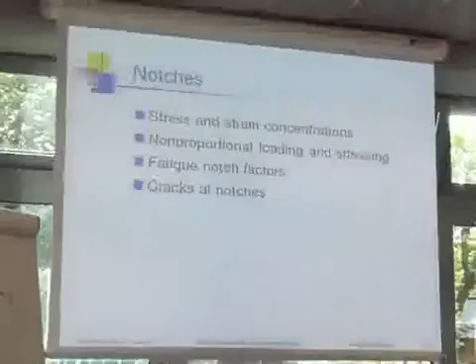So I wanted to take a little time this morning and talk about behavior of things with stress concentrators that are subjected to more complex loading. I'm going to talk about stress and strain concentrations and some ideas about non-proportional loading, and look at states of stress effect on fatigue notch factors, and finally I'll mention a little bit about cracks at notches.

So I always like to start in the morning with some little story, so I wanted to tell you one about my family. I was gone on a trip like this, and I got home, and at that time my daughter was maybe four or five years old. She's glad to see me, I think, but probably not. I said, 'Why don't you come to the office with me today, and I'll take you to McDonald's for lunch. I just want to go up and check the mail.' Well, okay, chance to go to McDonald's for lunch. So I went, and the graduate students figured out I was in my office, so they came to see me and I talked with them, and a few people called on the phone and I talked with them. The five-year-old is not as happy as she might be, but I was always prepared because I had colored chalk, and coloring books and all these things to entertain my children. So finally we go to McDonald's, and she's happy, and we go home, and when we get home, her mother asked her, 'What did you do today? You were gone a long time.' And the five-year-old said, 'Oh, it was really boring, really boring.' And then she says, 'Well, what was your father doing?' And she goes, 'Well, people came to see him and he just talked. And then he just talked on the phone. And that's all he did was talk. And I certainly don't understand why they pay him for that.' So this is what a professor does in the eyes of a five-year-old. And this is a story I've tried to improve on over the years, but I can't. It's a very good description of what I do. I just talk and I talk and I talk, and people pay me. Sometimes I have better things to say than others, but I don't know.

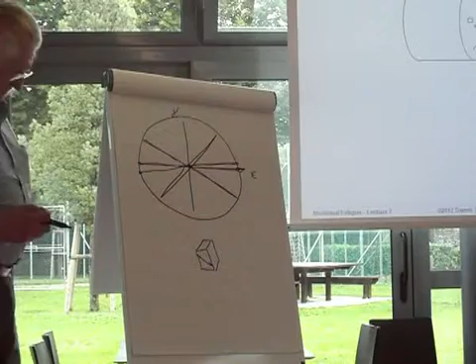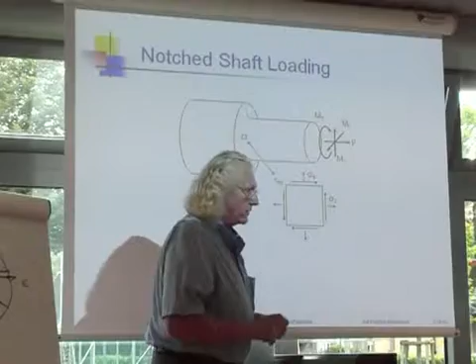Okay, so we can do this, and we know what our strategy is, because if you think about what we did yesterday - we said, fine, we have this big blob of material, and we know someplace there will be a critical element, so I've been drawing that just as a cube, and we have some external loads that act out here, and finally that resolves into stresses in particular directions in this cube when we calculate fatigue life. So the only difference now in going to a structure is I don't know where this cube might be located. If I just have a bar like this, it's pretty obvious where the cube is. So now we have another level of searching - I have to search through the structure and find the critical spot. And then once I find the critical spot, I have to find the critical directions in that spot and how the loads combine. Well, these are pretty easy to do, because I know the maximum stresses will exist here someplace around the radius.

It's worth pointing out the stress concentration factors for these kinds of geometries. If I look up the results for a bar that has a groove on it, and look at the stress concentration in bending, then for various ratios of the two diameters, as the radius gets very small, the stresses get very high.

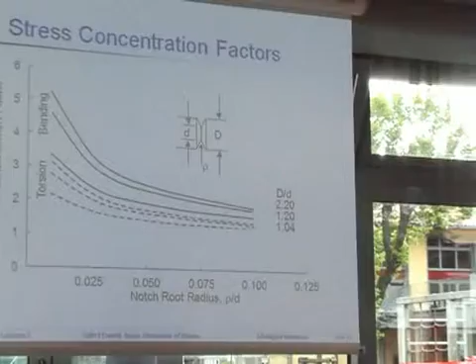I only show you this to demonstrate there's a big difference between the stress concentration factor in bending and torsion. If you could figure out how to make everything in torsion, structures would last a very long time. Remember yesterday I showed you that in torsion alone, material parts last a very long time because these shear cracks have trouble growing, and the stress concentration factors are lower as well.

So all the engineers know about stress concentration factors. So how about we look at what is the stress concentration factor for a simple hole in a plate?

Who thinks it's 3? You know, it's morning time, we need our morning exercise. That's usually a good answer, but the one I always give is: I don't know.

And the reason I don't know the stress concentration factor for a hole in a plate is that I don't know how the plate is loaded. So the stress concentration factor for a hole in a plate could be something between 2 and 4, with 3 being the most common. That's why yesterday I said if you don't know, that's the very best initial guess. It's always the best initial guess for these things.

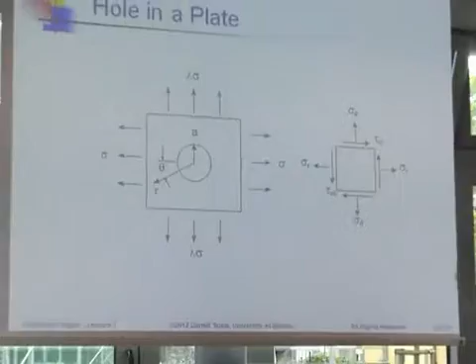So let's look at this a minute. There's a hole, and I showed this before when we looked at a crack. So I put a hole in there, and load it with the stress in this direction and some stress in the other direction, which is a constant lambda times this one. There's the hole, and I can look at the stress fields everywhere around that hole.

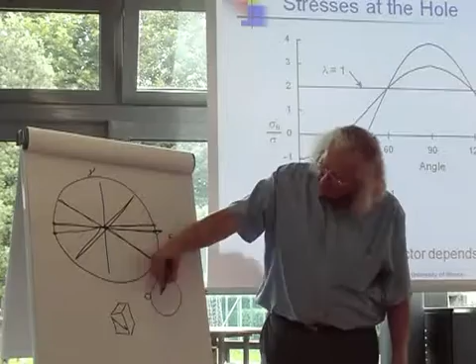If you just look around the edge of the hole, then if you have biaxial tension around the edge, the stresses are constant everywhere - always the same. And of course, you have the stress concentration: the magnitude of these stresses is only twice as high as the nominal stress. And of course, the familiar stress concentration of 3 if this were just loaded in tension, like that.

And if I twisted it, then the maximum stresses are at these 4 spots, and they're 4 times as big. So I really don't know the stress concentration factors until I know what the loads are.

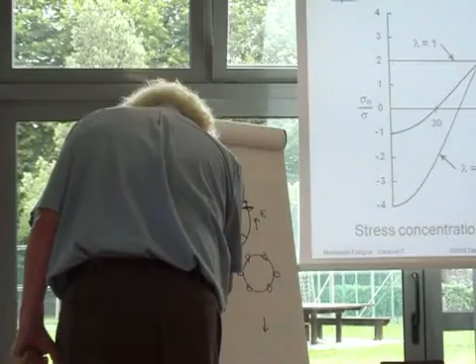The other thing is, what if I twisted the hole? What if I applied pure torsion to a hole? Instead of looking at what the tensile stress is here, I look at the shear stresses around the edge of the hole. And if you do that...

There's the shear stresses around the edge of a hole, which is loaded in torsion. And if you look right at the edge, you'll see that the shear stresses are 0. And they peak up at a distance of about 1.3 times whatever the radius is. Now why is that important? Well, I'll show you this slide first.

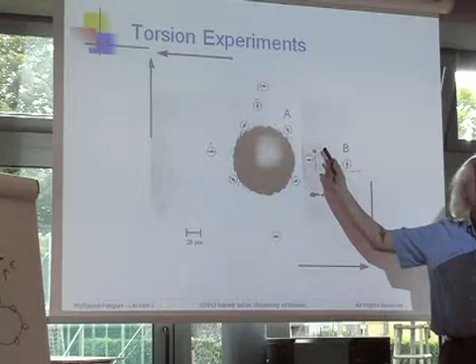If you have a hole in torsion, frequently you get all the cracks to initiate out here. And people say, isn't that strange that the cracks initiate away from the hole? This is a particularly important problem in rivets and aircraft. Frequently the cracks initiate not at the edge - there's a crack here, one over there, one out here. And if you fatigue test this for a very long time, after a very long time, you start to nucleate some cracks over here, and those cracks come.

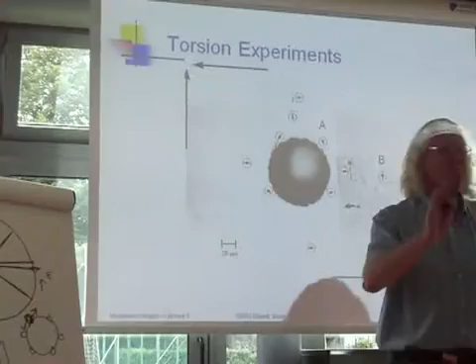I'll bet I can manage to trip over this wire and fall down before the hour is over. This is my prediction. Remember, if I don't get up from this, then the class is dismissed. You are not to help me.

Yeah, so these are the principal stress ones, right? The maximum principal stress exists there.

Okay, looking at all of the equations, let's go back to the picture of the hole. If you look around the edge of the hole, there's a little material element. Let's put this right on the edge.

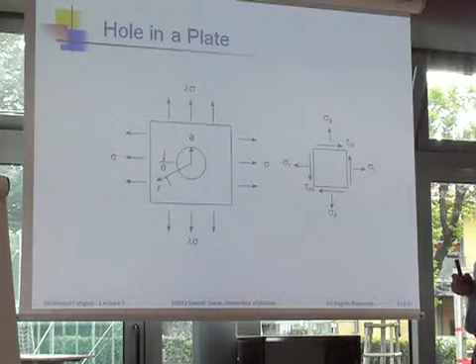Right here I could have three different stresses. I could have what amounts to a hoop stress, which I call sigma theta, the stress in this direction anywhere around the edge of the hole. Then I can have a radial stress, which goes this way, and I can also have a shear stress at the edge of the hole.

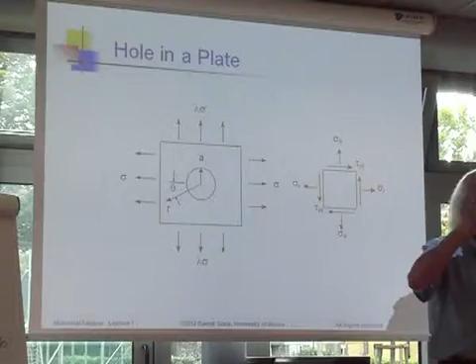What you find is that the radial stress must be 0 at the edge of the hole because it's a free surface, and the shear stress must also be 0 there for the same reason. So no matter how complicated the loading is for a plate with a hole in it, stresses around the edge of the hole where the cracks initiate are always uniaxial. It's always a uniaxial fatigue problem.

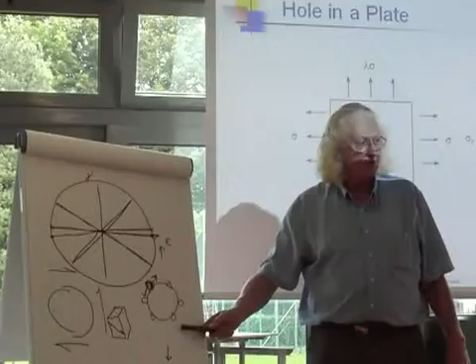That's why I say that for plate-like structures, plates with holes in them, or things that look like plates with holes, it's really not a multi-axial fatigue problem. The failure location may change, because depending on whether it's loaded in shear, tension, or biaxial tension, the magnitude of the stresses around the edge of the hole changes, and the location of the maximum stress changes too, but the state of stress is simply uniaxial tension.

So that means that the real multi-axial fatigue problems come from solid structures — things like shafts and turbine blades, things that have a lump of mass of some sort. Because there you truly can build up multi-axial stress situations.

So if we look at the loading of notches, I want to look at three cases. First, uniaxial loading that produces multi-axial stresses at notches. Second, multi-axial loading that produces uniaxial stresses, which is the one I just talked about. And third, multi-axial loading that gives multi-axial stresses as well around notches.

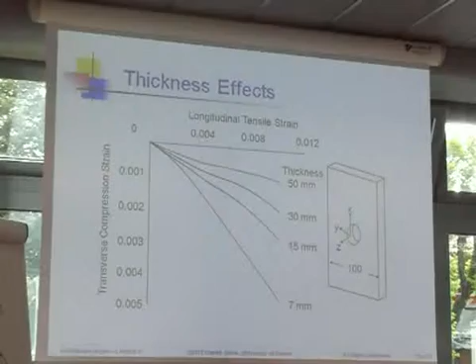This is the one I showed you yesterday, so I won't spend extra time on it, other than to say I have a plate with a hole in it as before, and I said you can pretty much ignore multi-axial fatigue when you have structures with plates with holes in them. That's true until the plate with a hole starts to look like a solid.

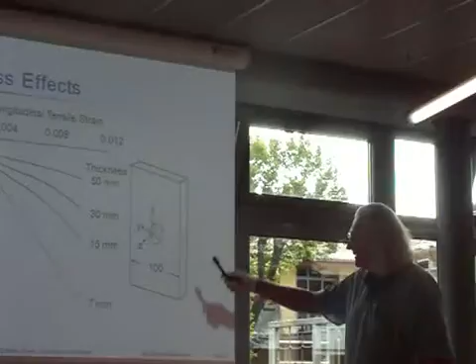If I have a really thick plate — suppose this plate is 100 millimeters and I made it 50 millimeters thick — that's a solid just like a shaft, unlike a plate with a hole in it that's 5 millimeters thick of these dimensions.

So let's look at the other case a little bit: multi-axial loading that produces uniaxial stresses. Let's just take a bar and bend it in a couple of axes.

Let's take a practical situation — maybe this is the axle on a car or a tractor or something like that. Maybe the axle on my all-terrain vehicle. So you can imagine what happens.

As I'm driving about with this vehicle, it's going to come up and down like that from the weight. But I'm not a very careful driver, and I'm not deterred by small trees and things like that, so I'm quite happy to run over them.

When I do that, I get a big force in this direction as well. So looking at what's happening to the axles on my ATV, it does this for a while sometimes, and sometimes this, and sometimes all kinds of combinations.

Let's look at this in a very simple idealized example: I'll put a moment in the X direction and a moment in the Y direction, and say this is the repeating load pattern that I have. And how do these things combine?

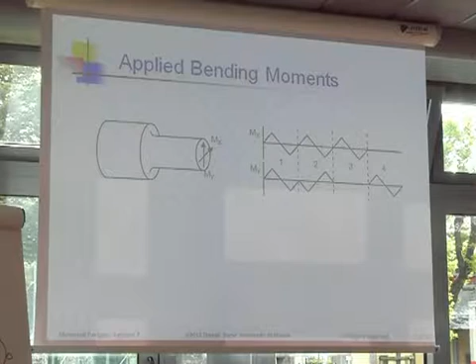Yesterday I gave you all these quizzes about how loads combine to produce different states of stress in my material element. Today I want to do the same thing, except rather than looking at how different loads combine to produce stresses in the material element, we'll look at a real three-dimensional object where the stresses combine to produce failures in different places. Sometimes two loads damage the same place, sometimes they don't.

So if we just look at this, you can see what happens. In the first one, I have a moment in both of them. In the second one, I have these two moments which are just out of phase with each other, and then I have a moment only in one, and then a moment only in the other. If we put that loading history and all the geometry into any of the FEA solvers, this is what would happen.

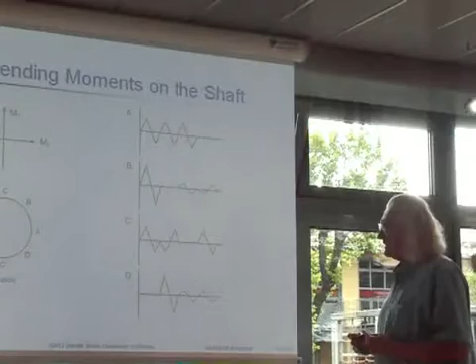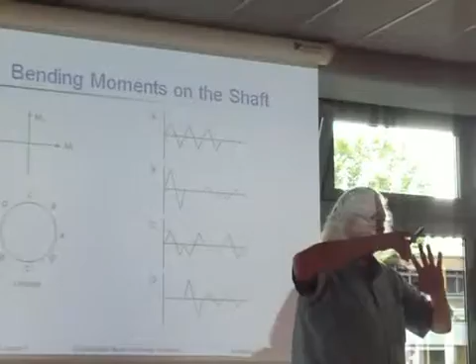So if we look at the first failure location, think about the shaft, and I just mark different locations around the edge of the shaft. All the loads in the history I chose were completely reversed in tension and compression. So as I look around the circumference of the shaft, whatever happens at A will also happen at A prime, just at the opposite sign because it's bending. So for this simple example, I know I only have to check 4 locations.

Before I check, I have no idea where this may fail around the circumference of the shaft. So if I look at the loading history at A, it will just combine with this magnitude. But remember, I have bending in this direction and bending in that direction as well. It's a trivial example—you know the answer that those two bending moments will combine at 45 degrees to produce something of even larger magnitude.

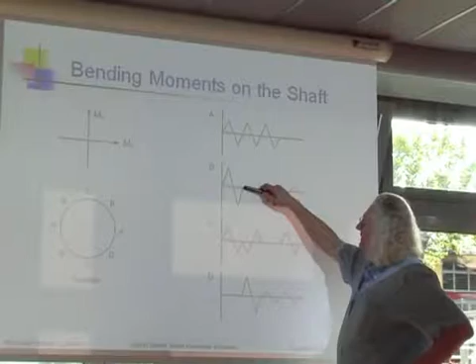So if I look at that loading history, you can see there's a really big cycle at the beginning and then pretty small cycles after that at point B. This is what happens at point C at the top, and this is what happens at point D at the bottom, and at that spot at 45 degrees.

So if I have a simple shaft like this that just bends in 2 axes, that's pretty easy to analyze. But how about that motor carrier that I showed yesterday? That particular one has 16 load inputs. So how do those 16 loads combine to produce damage in some spot in the structure? Of course, the answer is I never know.

But the concept is just what I've said here. We just combine all those loads and do a brute force search to find out what places in the structure see the highest loads. That's all there is to it.

In this loading scenario, if I look at the loads, I can say that was complex and out of phase and all those kinds of things. That may be true of the loads, but from a materials perspective, this is simple, constant, uniaxial loading, isn't it? Because the external loads combine at different places in the structure, and at each of those places, it's a uniaxial stress state.

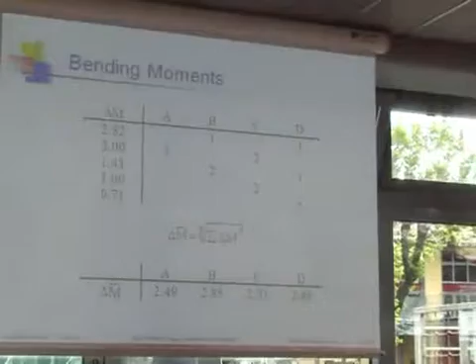A lot of times I am interested in finding the failure locations, and I'd like to find them very quickly. When I do that, I have very easy things.

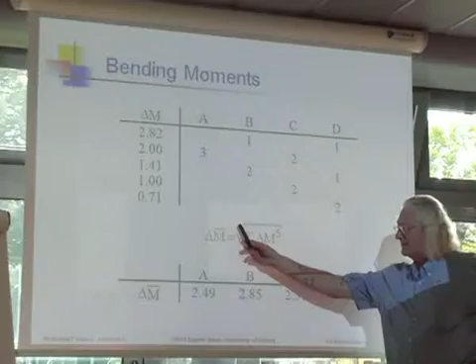If you want to get some idea about where the failure location is, there are some tricks, and this is one I told you last time. There's a universal slope to all SN curves, so if I want to know the relative damage of something, the easiest and fastest way is to take the ranges of stresses or moments, raise them to the 5th power, and take the 5th root. That gives you one stress number you can compare at different spots in the structure, so you can quickly find the most critical spot and focus all your time and attention there.

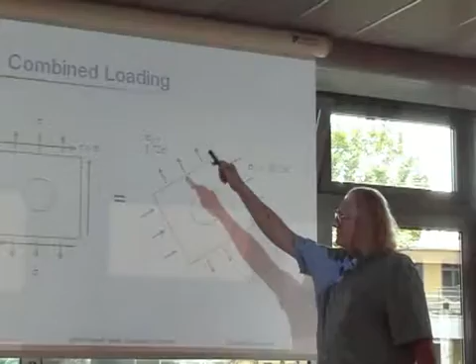So let's now look at combined loading. You can get multi-axial problems only as you start to add shear stress. If you think about taking a plate with a hole in it and subjecting it to both tension and shear stress, what's going to happen is you produce a maximum stress in some other direction, not the loading direction. For shear and tension loads equal to one another, the principal stress is almost twice as high as before.

I show you this slide because I'm going to show it again, since it's the quiz question - about one of 10 slides in the quiz - about what happens when you load things in tension and shear.

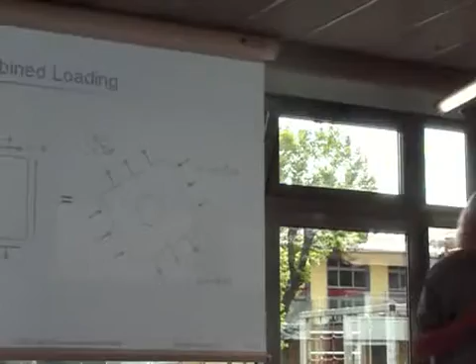Anybody think of an example where something is loaded in bending and shear, a plate with a hole in it? Wing of an airplane - it bends. A big engine sits out here, sometimes does this, and twists a lot, and bends a lot if it goes through turbulence and twisting. So it's an important load case.

All this kind of stuff is simple mechanics. Depending on what the loads are - combinations of both bending and twisting - you can imagine I'm flying through the sky doing whatever, doing this for a while and that for a while. If I took the loading history and just took every load like this, and the twisting loads, and added them all up, I would have a very pessimistic estimate of what the life of the airplane would be.

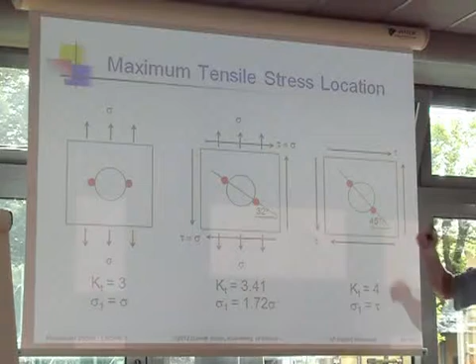The reason is that every time it flies, when it's doing this, it's damaging this location around the edge of a rivet hole. Then when it's twisting, the loads may be much higher, but it's damaging a different spot. And there aren't as many twisting loads. Maybe it's only twisting and not bending at all, and that damages yet a third spot. So what happens in a real structure frequently is damage is distributed around the stress concentrator. Unlike what we do in the lab with little test coupons where all the damage is focused on one spot only, a real structure is distributed everywhere. That's why things can last a long time.

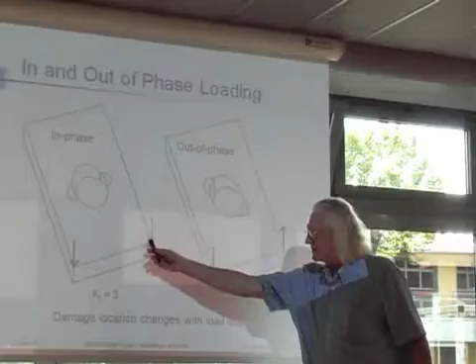We talked yesterday about in-phase and out-of-phase loading. Here's another example of the same idea, that the damage location just changes with phasing. So I take this plate, load it, and put two loads in phase, and that damages it where I've shown. If I just change the phasing of the loads, that changes the magnitude of the stresses, but it also changes the damage location. I'll leave that topic with all those examples, and go on to things that really cause multi-axial stress problems.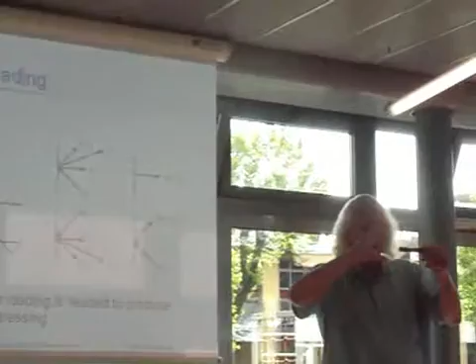A way to get multi-axial stress problems and out-of-phase loading is to take these solid structures and introduce shear. You can take a shaft and think about having a bending moment in one direction and a torsion applied to the shaft. I run a small loading history and think about the stresses in the X direction, the bending stresses, and the torsion stresses. For this geometry with just bending and torsion, there's one spot that sees the maximum load because the shear stress is distributed uniformly around the edge. If I wanted to make the problem more complicated, I'd add another bending moment, and then I could distribute the damage everywhere around the circumference.

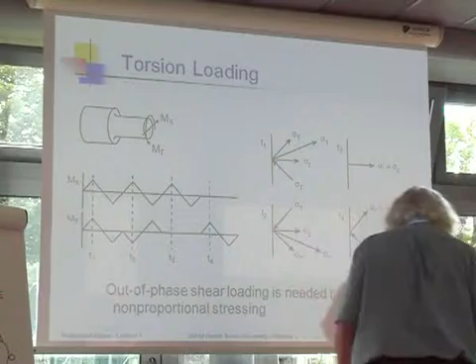I'd like to show you how the macroscopic stresses combine. Let's look at what happens at time t1. I have two principal stresses that come from the torsion, here and here, and I have bending at the same time acting in that direction. Those are the individual components, so you have to more or less add these vectorially - that's not literally true because you have to account for differences in area, but let's visualize it that way. When we vectorially add those stresses, we get a big stress out in this direction, at an angle of about 30 degrees.

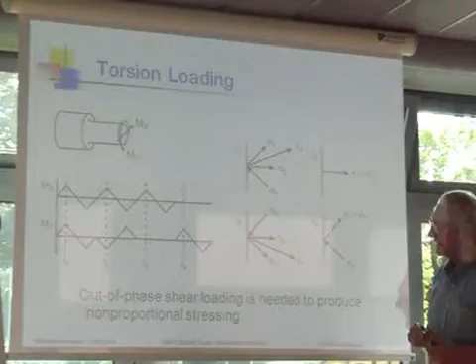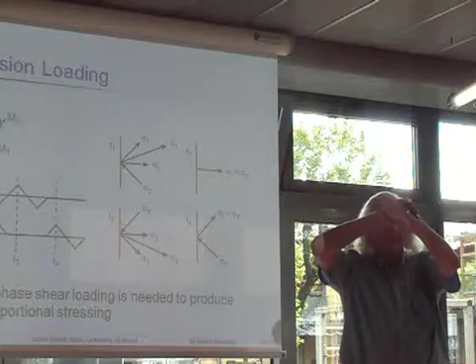Now as we proceed to time t2, we have a different situation because I've simply changed the direction of the torsion. When I change the direction and vectorially add these again, you can see I have a big stress component out here. So what's happened is the principal stress direction starts here and moves over to here, which means all the shear stress directions change as well. This means I have one of these out-of-phase loading situations where I'm activating all shear planes between this one and this one.

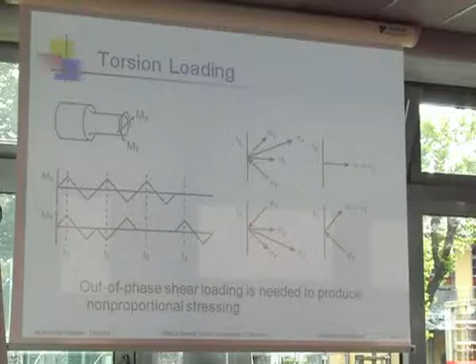Then finally at time t3, the principal stress direction is just in this direction, so now I'm damaging one plane, but the magnitude is much smaller than the others. Finally at time t4, I have the two principal stress directions like that, and I know where the maximum shear plane is. So if I want to analyze this, it's really a non-proportional loading problem. After finding the point in the structure, I now have to find which planes and directions have the most fatigue damage.

Okay, so now I know what the macroscopic stresses are, and I have to search and find all these locations. Let's say we can do that. I have another problem now when dealing with real components that we haven't talked about yet, and that's the effect of the gradients.

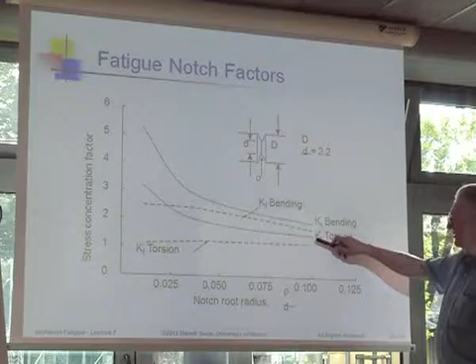So we have this concept of the stress concentration factor - these are the bending and torsion cases I had before - and as I go down with the notch root radius, this goes up, and if the notch root radius is zero, then the stresses will be infinite. I have no problem with an infinite stress in the structure.

Why not? The infinite stress acts over a length of zero, doesn't it? So how can an infinite stress acting over a length of zero be damaging, if it's acting over a length of zero? It's a problem, isn't it?

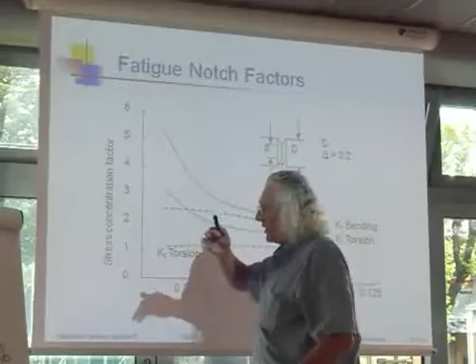If we think about it, a real material has some kind of crystal structure, and we have to have a concept that a stress has to act over some volume of material. Material scientists always talk about this as the process zone of the material - it's that stress which is important, not the infinite stress which acts over zero length. We can take that same concept, for both torsion and bending.

Let me talk about some real data. So I take these two structures where the middle diameter is the same. I run a bunch of tests on this one, and here is all of the fatigue data.

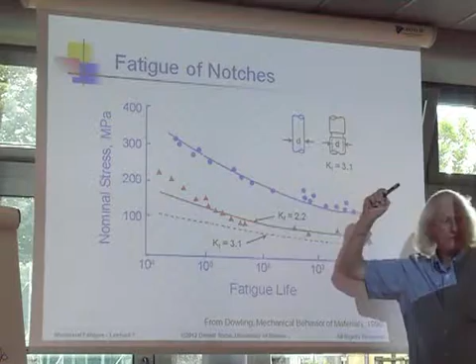And I do all the theory of elasticity correctly, and I calculate what the stresses are here, and the stresses here turn out to be 3 times the average stress. So that means if I wanted to apply fatigue theories, what should happen is I should take all of this materials data here, and then divide this by 3. And that should be a very good estimate of what this does, because that would put the same stresses there. And if I do that, this is the line you get by dividing it by 3.

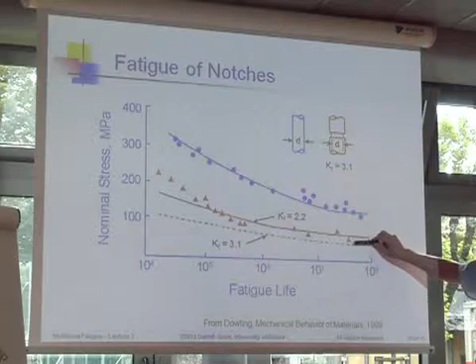And then you go into the lab, and after going into the lab, you say, what do the real experiments do? And you can say, wow, this is pretty good. Look, I was expecting at this stress level to have a life of about 100,000 cycles, and in fact, I could go 10 or 100 million. Pretty significant error, isn't it?

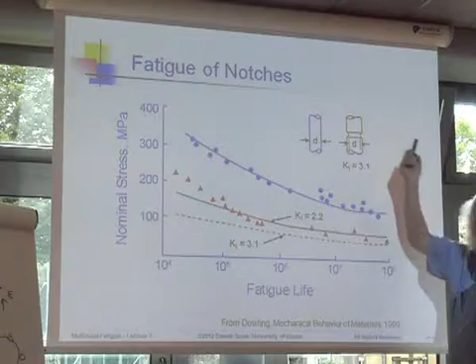You say, wow, this maximum stress is not what's really important, right? The effective stress concentration is only about 2. The 30% difference, right, and 30% lower. Almost everything people do in fatigue reduces the design stress, so things are bigger, heavier, and so on. But here's something that says, wow, maybe you can use higher stresses than you think.

So let's look at this effect, and this is the so-called gradient effect in fatigue. And I like to explain

People have looked at this, people have looked at all of these gradient things for a long time, probably for more than 100 years. And there are a couple of famous pieces of work.

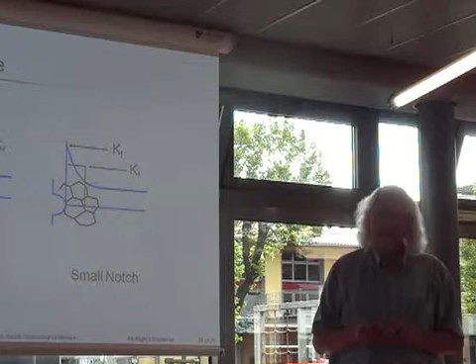One of them is by the German Neuber. And Neuber actually was a mathematician. Many of the stress concentration factors that we use today come from his work. And I always assign his papers to my students to read because they are incomprehensible. Yeah, they're filled full of elliptical coordinates and so on, and then at the end pops out the answer. And of course we are only interested in the answer.

But he also was interested in these gradients, and he explained things as follows. He had a concept of a mosaic block size, is what he called it. And he said it's some kind of material process zone. But he was a mathematician, not a material scientist, so he didn't associate it with any specific material dimension. I always like to do that, even though it's not correct, because the material dimension is not the grain size. But I like to use these individual crystal sizes just for illustration, because it helps us understand it a little better.

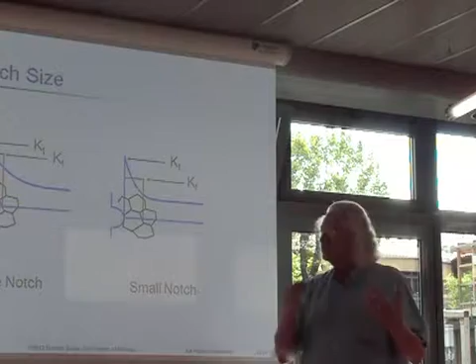So imagine now that I have this circumferential notch, and here's just the outside geometry that we looked at. And I think about what the stresses are. So I have all of my stress analysis, and here is the stress field. As we go away from the notch, the stresses become lower. And when I had the previous slide, that stress we calculated, 3 times the average stress, that's the thing way up here. I'll just say that that's the stress coming from KT.

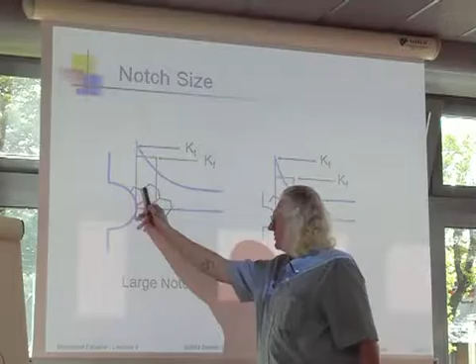And now I superimpose that stress onto the microstructure. I've drawn a little microstructure here of these individual little grains, right? And think about this now as the process zone. If that's the process zone, what stress acts in the process zone?

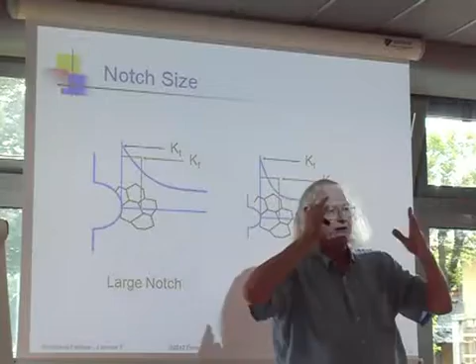Well, it's not really the maximum stress. If I think about this from a material science viewpoint, an individual crystal in a material cannot support a stress gradient, because I reach the critical shear stress, and as soon as I reach it, that crystal shears. A dislocation runs from somewhere in the middle out to the entire edge. So you can have this concept that materials will have constant stresses over this process zone. And like I say, I like to use the grain size as the process zone because it's something I see in a microscope, even though it's not quite the right dimension.

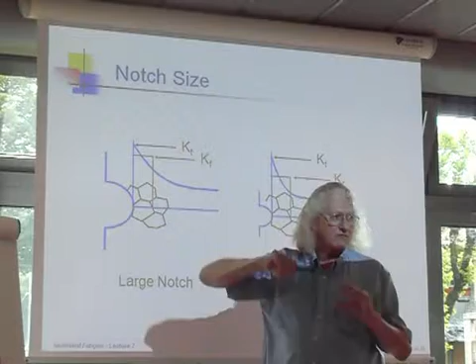So this idea of the fatigue notch factor, Kf, from the previous slide says, okay, I want this average stress here, and this average stress here might only be 2 times the nominal stress, and that's the effective stress concentration in fatigue. That's the idea behind this.

What would happen if I made things smaller? If I just make this geometrically smaller and look at the stress field, making it smaller essentially moves the stress field in this direction. Now I apply the same arguments: I want to test something with the same stress concentration. In a real structure, we don't think in terms of stress concentration factors, but think of this as the calculated surface stress in a finite element model of something a little smaller.

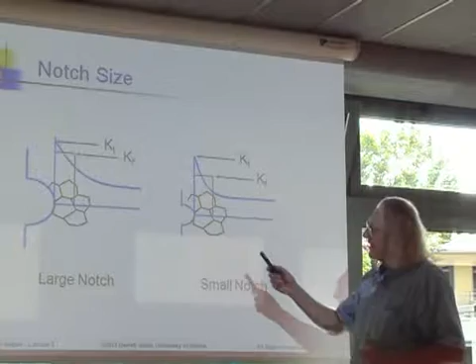When we do that, I look at the same material, so the microstructure size hasn't changed, and this process zone size has not changed. So now this was the maximum stress, but in the process zone, my best estimate is the average stress from the elastic stress distribution, and this average stress is lower than the maximum.

And that lets us make sense of classic experiments. Suppose I took this big plate into the lab and put in different size holes.

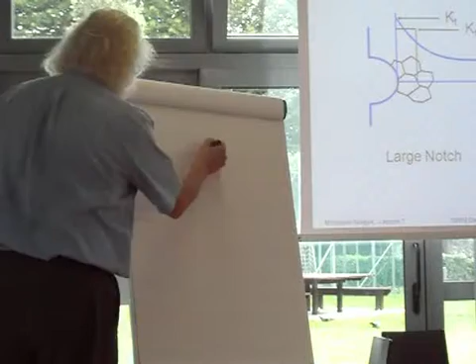Finally, one down there you couldn't see. And I analyzed this for all the stresses.

If I analyze this for all the stresses, the stress at the edge of this hole, this hole, this hole, and this one would all be the same, because they're all round holes in this plate. But there isn't anybody in this room who thinks the failure would occur from the smallest hole.

Everybody would guess this one, and that would be probably what happens almost all the time. Maybe this one once in a while—once in a while things just go wrong in the lab—but almost everyone would guess this, and this is what would happen in the lab.

And this is the reason: I have high stresses at the edge of this hole, but they act over a very small length, and that length might be much smaller than the material process zone.

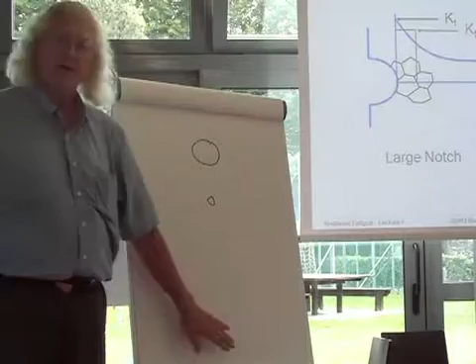So in fact, I could make a hole small enough that it would have absolutely no effect in fatigue. Any guesses what that means? How small is small, in numbers?

So what is the size of a crystal in a piece of low carbon steel? What is the size of this? 20 micrometers. So if I had a hole that was smaller than that, it would probably have no effect.

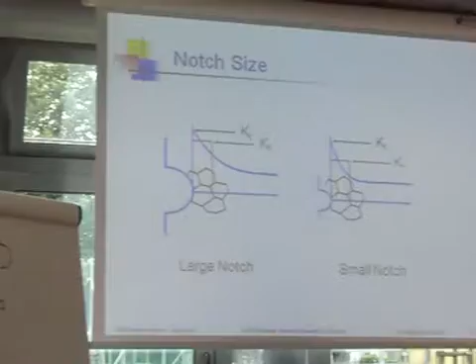And there are people who do this. Professor Murakami has done this since he's been a graduate student—drills very small holes and runs fatigue tests. You find out that somewhere between 10 and 100 microns, depending on the material, will have absolutely no effect in fatigue.

Pretty nice. You know how to drill a hole, a very tiny hole? Pretty clever the way he does it. Because they have a very high-speed little drill press with a very small drill, so you can actually drill those size holes. Of course, if you've been in the lab and tried to drill a hole, you know the technique—you put it in there, pull down the handle, and all these things.

The way they do it is they simply pass an electric current through the specimen. When the drill touches the specimen, a little light comes on, and as soon as they see the light, the graduate students stop immediately. They say, okay, I have a little hole now, and then go over to the microscope to see how well they did.

It's pretty clever. Okay, so you have the idea of what happens. Now let's look at this—I said the size of this thing, which would be non-damaging, is on the order of maybe 10 to 100 microns. Let's look at the effect of the materials with this.

So if you have a lower strength steel, a piece of carbon steel, this is the diagram I used before. Now let's have the same plate, but make it out of a really high strength piece of steel. What will happen? In a high strength steel, I'll have all the same stress gradients, except the microstructure will get really small—that's how we make high strength things.

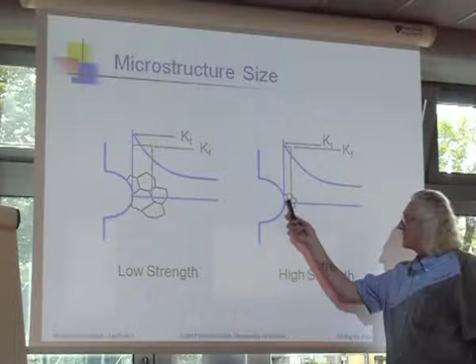Strength and microstructure size just go together. So I make the same arguments: what is the stress that acts in this little process zone? Well, the stress that's acting in this process zone is much higher than this one.

So if I go back to my thought experiments, let's look at what might happen. Of course, I don't have a good size scale here because I can't draw a 10 micron hole, but let me talk about it as if I did. Maybe in the low strength material, both of these holes are big enough to have really high stresses in this process zone, and maybe these down here are small enough that the stresses are pretty low.

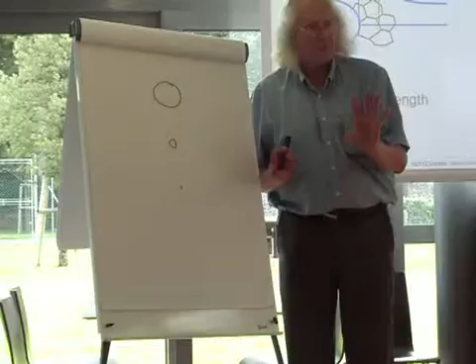So if I really went into the lab, maybe the majority of the failures would come from this one, but every now and then you'd get some from this one. And never from these. My stresses are just not high enough.

Now I do another set of experiments. I take this same plate, or many of these same plates, and make it out of a really high strength material. Now the stresses are high for all of them, because this one is big enough such that the stresses in the process zone are really, really high, since the length scale is small.

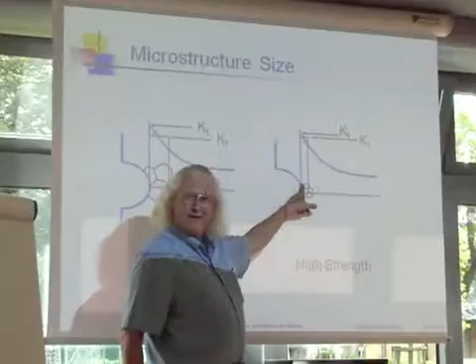I'm only interested in stresses up near the edge, and the stresses up near the edge of all of these now are the same. So that's the idea behind gradient effects.

You can do other things about changing the shape. What you tend to find is that if you put something with a higher value of the stress concentration factor, Kt, then there's always a sharper stress gradient. That's the reason the stresses are high here, and there's a much bigger difference between the Kt and the Kf.

This approach has been around for, I don't know, maybe 100 years people have been doing that. And it's completely empirical. There are other ways to look at it, and what's implemented in much of the software are things looking at a critical distance.

Because if I go back through the past 3 slides - I won't do that - but what I showed you is a reduction in the stress that acts on this critical element size. But it really has to do with the length. This stress is acting over some length.

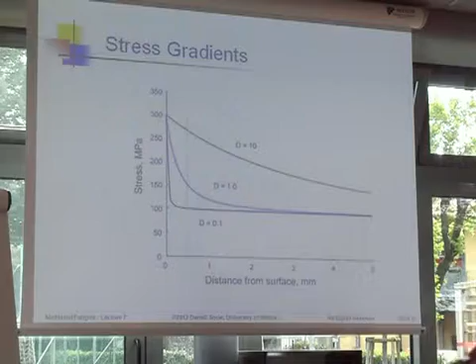So let's take these holes, plate with a hole in it with different diameters, and just look at the stress gradients now. Suppose this is a 10 millimeter hole, this is a 1 millimeter hole, and that's a 1/10 of a millimeter hole.

You can see what happens: I have to have a certain size, and maybe my microstructure size requires that the microstructure is maybe a millimeter - really low strength material. So maybe the process zone might be half of that, let's just say 1/2 millimeter. Let's look now at the distance from the edges of these holes - what are the different stresses at a 1/2 millimeter?

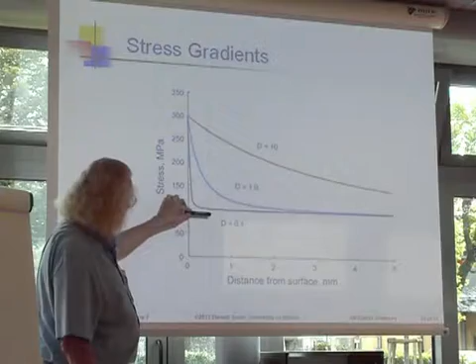What you can see is, actually they're still really high for the top one, and they're only half as much as I go here. And if I put in the very smallest one, there's no stress concentration at all.

So if I wanted to do an analysis, one of the easy things to do would be to say, fine, I have all of my numerical analysis - let's simply not ever look at what happens on the surface. I want to look at what happens a little bit below the surface, a little bit subsurface. In fact, that's what people who do the calculations really do - we rarely look directly on the surface because we know these gradient effects are important, particularly for smaller things.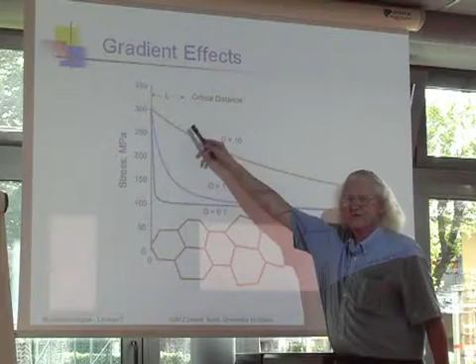So we'll use a subsurface stress, and the idea is we want the stress in this process zone. There's putting these two concepts together - so there was my material size, and I want the average stress in the middle, so I will take half of that distance and use it in the calculations.

Other people still like to use these fatigue notch factors. It's kind of interesting. People have been developing these empirical fatigue notch factors.

There's one of the formulas. This formulation is due to Peterson. Neuber's formulation looks the same, except it uses the square root here instead of a linear function. The effective stress concentration is 1 plus kT minus 1 over 1 plus A over R, and A is this mosaic block size.

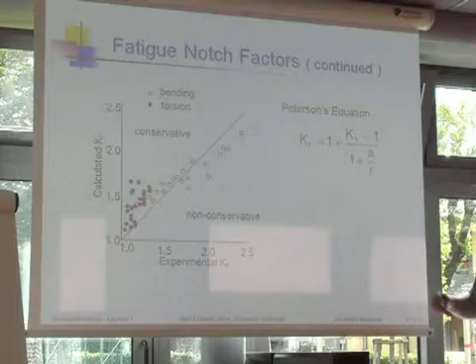If you try this in bending, since people have been doing it for 100 years, you can see there's a pretty reasonable correlation between this calculated KF and the experimental KF.

By the way, that must happen. Why must it happen? It's an empirical theory. All I'm doing is showing how well I fit the data.

We take all the data, we plot it. I recommend doing that. Not enough people take their theories afterwards and plot it and see if it reproduces the original data. Just as an aside, that's one of the critical things to do in all of these plasticity equations.

I have these plasticity equations, I take the strains as an input, and then I might use my plasticity models to tell me what the stresses are. If you want to check your model and you have a good model, you should be able to take those stresses, put them back into your model formulation, and see if you get out the input strains.

You will be surprised how many models that doesn't work. You will be very surprised at how many. Okay, anyway, so that's what happens in bending.

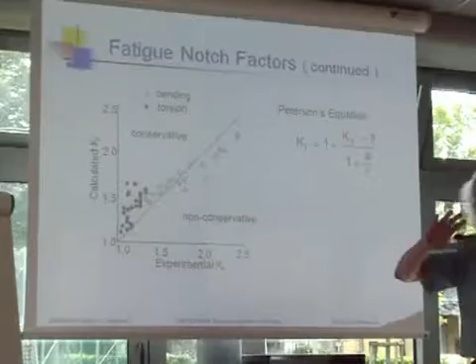If you take the same shafts and do it in torsion and apply all these little empirical rules for what happens, you can see in torsion the correlation is not all that great. But people still use it because they say, well, it's just fine. At least it's on the conservative side, so I won't get in trouble.

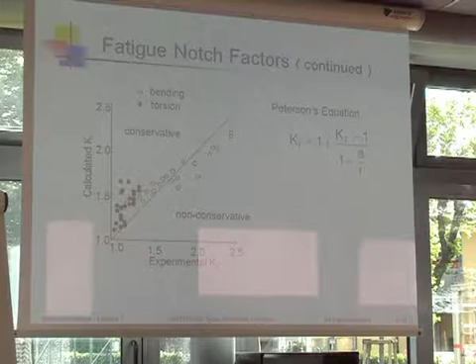So I was at a conference about high temperature fatigue some years ago, and there was this young man from Shell Oil. He did some experiments comparing different theories about high temperature fatigue. Then it became question time, and one of the academics whose name was on one of the theories — not me, because I didn't do high temperature work, so I'm in the clear here — asked him, well, what do you guys really use in design?

And the young man said, oh, we use such and such a theory, and it was the one that had the worst correlation in the plots. And of course the academic said, well, how can you do this, it's not based on the physics and so on. And this very calm young man said, do you realize how much money it costs for us to get a broken drill out of a hole in the ground that's 5 miles deep?

We're never ever going to use a theory that has a chance of a non-conservative result. We don't care if it's right. We just want to be sure you don't get in trouble. And this is the difference between us academics and scientists, and the engineers. The engineers want to first and foremost make sure they don't get in trouble.

So a lot of people use these things, right? A lot of people use these things. Like I say, if you twist something in torsion, it's really good. Figure out how to make everything twist in torsion.

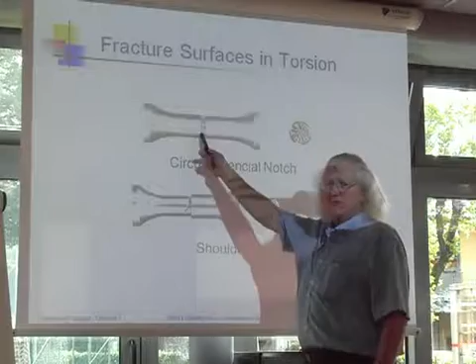We can either look at something that has a step shaft like this, or we can look at something that has a groove around the edge. I have my view of fatigue, and I have my calculations, and I calculate what happens at the root of the notch there, or I can calculate what happens here.

And if it's a long life fatigue problem, then I showed you yesterday that these are these spiral cracks. But what happens when you start to get these long life spiral cracks in this situation? The cracks grow out of the stress concentrator.

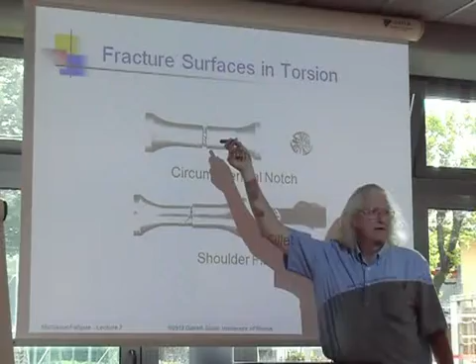Of course, if the cracks grow out of the stress concentrator, they're not going to go very fast at all, and the lives are really, really long. That doesn't happen in tension. That's why tension is the dominant failure mode everybody is really concerned about, because if I had these same geometries in either tension or bending, all the crack growth would be through the thickness trying to break it. You wouldn't have these scenarios where the cracks try to grow out of this and grow along here.

And here you can see how this is spiral, right? The crack starts there and then goes way outside the stress concentrator and spends a long time growing in a low stress zone. Okay, that's what happens.

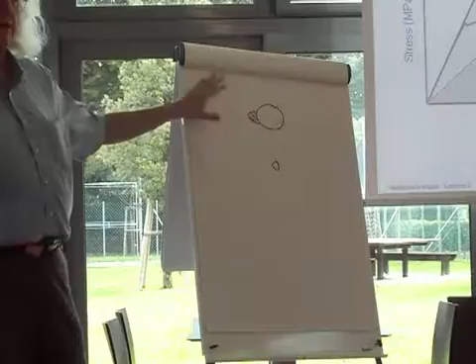How about the mechanics behind these things? We want to do calculations because we want to know what are the real stresses and strains, and almost all the calculations that are done are all done on an elastic basis. So let's come back to my plate here and suppose I want to know what are the real stresses and strains here, including the plastic deformation that might be there. And I only have the elastic solution.

So I know what is the elastic solution, so I apply some nominal stress here. And I say only the elastic solution, so let's say I'm just going to do a finite element model, an elastic finite element model of however complicated a shape you like. And I want to know what kind of plasticity I might expect to find in the zones around here. To do that, we do something very simple, which is called Neuber's rule.

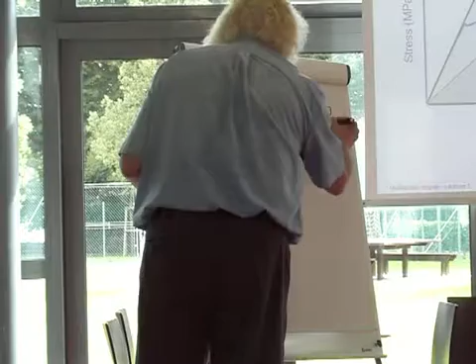As I mentioned, Neuber was a mathematician, and there's a famous paper that's derived in elliptical coordinates of a beam in axisymmetric shear. What that means is it's a beam that looks like this in cross-section, and it's loaded in shear like this.

Okay, that was the test problem. And Neuber said in his paper, 7 or 8 pages full of incomprehensible mathematics, he derived the solution for an arbitrary material law. So presumably all real materials are a subset of his derivation, since you derive it for an arbitrary material law. So there's no problem having a stress strain curve in Neuber's derivation that looks like that, pretty much like a real material. Right, that was pretty good. He derived all the mathematics, and at the end he said, this may prove useful.

And he wrote down that the real stress concentration factor is equal to the geometric average of the stress and strain concentration factor. That's what he wrote. I've simplified those 7 or 8 pages of mathematics into this one formula up here.

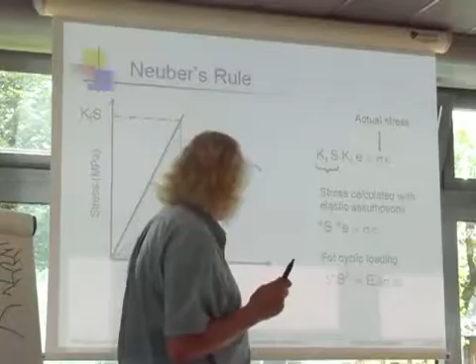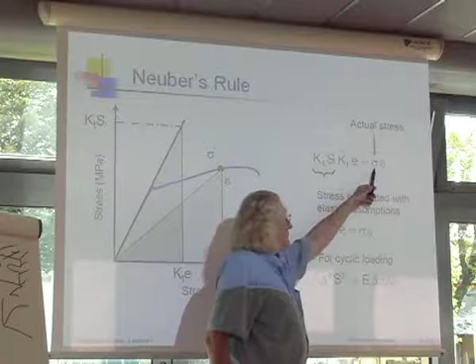What it said really was, if you look at the elastic solution for stress and strain, I wrote this as kT times the nominal stress in this mechanics, strength of materials approach, but this could just be the elastic stress that comes from the finite element model as well. The product of the elastic stress you calculate times the elastic strain you calculate is equal to the product of the real stress and the real strain. And that turns out to be very, very powerful.

Since it's an elastic model, stresses are calculated with elastic assumptions. So I have this elastically calculated stress and strain equal to the real stress and strain. Then we say, well, for cyclic loading, I just replace the stresses by the stress ranges and the strains by the strain range. But the idea is the product of the elastic solution is equal to the product of the real solution.

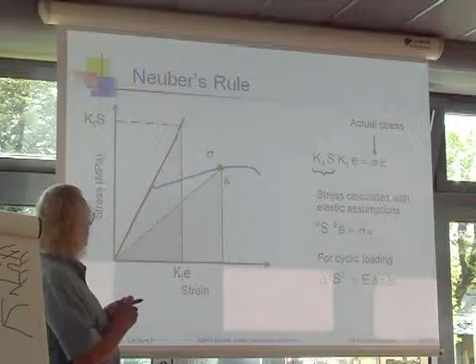So let's just look at that. I have a material stress strain curve, shown in blue, and I have a solution way up here, because when I do an elastic solution it doesn't plastically deform, so I calculate stresses which are too high, and strains which are too low. So I've calculated the solution here elastically, and of course I know the real solution must lie somewhere along this curve, because that's the real material response.

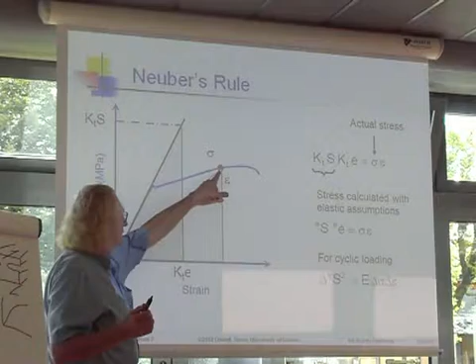And where does it lie along that curve? If you look at this, this is essentially an energy argument, because if I put 1/2 out in front of both sides, I get the energy. So you can essentially say that this area is equal to this area. For this, I've exaggerated this a lot. The normal plastic strains we deal with are way down here, so using this method you get a very good approximation of the energy that's under the stress strain curve. That's why it works.

And people have been using that for uniaxial fatigue for the last, I don't know, 30 or 40 years. There are some other rules where people actually calculate the strain energy and they worry about the shape of the stress strain curve and so on. It gives a slightly...